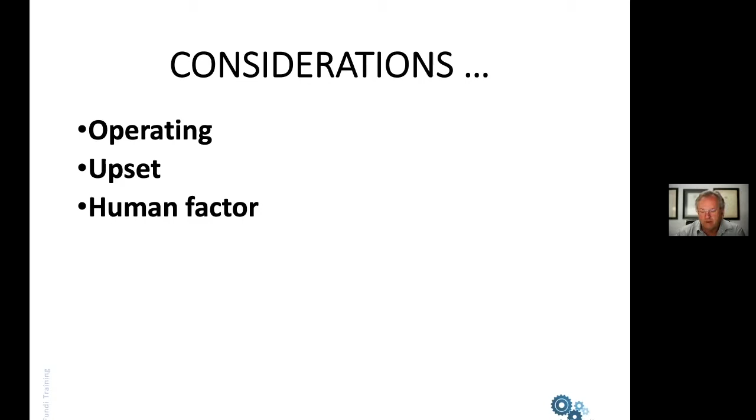We need to think about what can go wrong in the process that we're involved in that can change the conditions that we are in fact subjecting our structure or our plant or whatever it is. What are those conditions that we're subjecting it to? How can they change? And what effect is that change going to have? And then, of course, we're all human and people can make mistakes. We can overlook things. We can make choices based on previous experiences, and perhaps those may not be the best. So let's have a look at some of these aspects.

In operating conditions, perhaps the most important thing is how long do you want this thing to last? You know, you can make something out of 12 millimeter thick plate and it'll last for 200 years. If you only need it to last for 5 years, why make it out of 12 millimeter plate if that plate is going to corrode away? You may have other aspects such as strength and so on, which may determine that 12 millimeter plate is necessary. But then you need to know that that 12 millimeter plate is going to last for the entire life. If it corrodes away at 1 millimeter per year, in a couple of years' time, it's going to be unserviceable.

Temperature is a huge aspect to consider. Things that work well at ambient temperatures do not necessarily work well at high temperatures. Those high temperatures can be temperatures that we just experience out in the environment. Leave something out in the sun in the Northwest Transvaal, and you find that the temperature will go up to 60 or 70 degrees. And not all the materials perform well at those sort of temperatures. You may well design something for flow conditions, but what if that flow condition includes abrasive materials that wear away the coating that we are looking at, for example?

Sometimes just velocity can cause a problem. How fast is the liquid moving in a pipeline, for example? So many water pipelines are designed with a flow rate of something like 2 meters per second. What happens if you suddenly put in a constrictor, or if you have an elbow and the velocity increases significantly? Is it going to change the expected life of that material? And perhaps one needs to then put a different material of construction in place to handle those conditions.

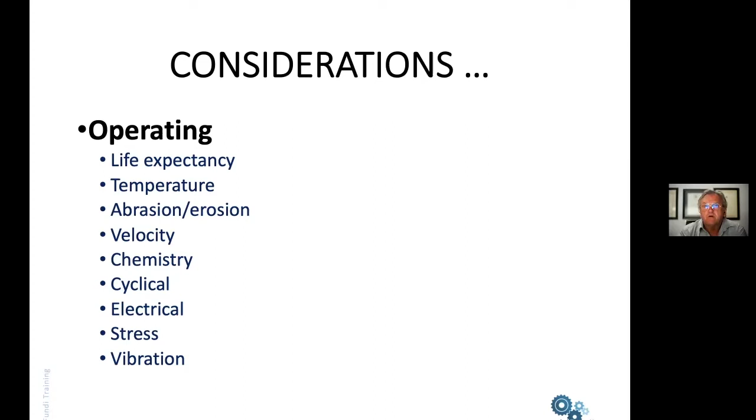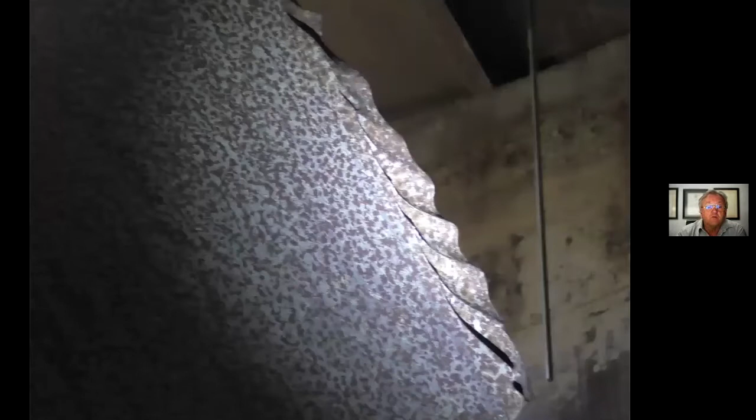Here's a photograph of a material that was selected based on chemistry and temperature. And as you can see, although there's some slight discoloration of the weld compared to the rest of the material, it has performed pretty well. But what wasn't taken into consideration in this particular case was erosion. And the net result was significant erosion corrosion on the tips of the impeller due to the abrasive nature of the slurry that was being agitated.

What about upset conditions? Perhaps one of the most common upset conditions is temperature. I remember a situation where we were called on to design a protection system for a bottle washer, and we had a very short period of time in which to do this work during a shutdown. And so the material that was selected was one that could take the temperature that we were given as a design factor and could be applied quickly and would cure. A few weeks after the bottle washer had been put back into operation, we got a panic phone call from the operator that the coating was coming out in sheets and contaminating the bottles.

So we went and had a look at this, and the coating had all the appearance of having been cooked. So we said, well, what is the temperature? No, here's the temperature. It was 55 degrees C or thereabouts, if I remember correctly. And we said, well, this coating has been subjected to much more than 55 degrees C. He said, no, that's impossible. If we exceed 55 degrees C, we're going to ruin the product. So we put some temperature recorders in this bottle washer, and guess what? During the night shift, the environment went up to 80 degrees C, not exactly what had been designed for. So we need to be very, very aware of upset conditions.

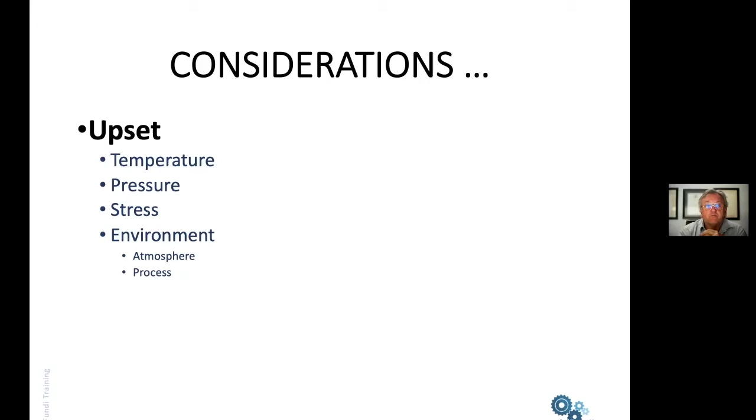So they were packed in straw and sent in a nice strong wooden box. The only problem was that whoever was handling this didn't realize that the contents were actually relatively fragile. And silicon iron anodes, if you drop them, they break. So our wonderful anodes were perfectly suited to the environment in which they were intended to be used, but totally unsuited to being transported in a wooden box.

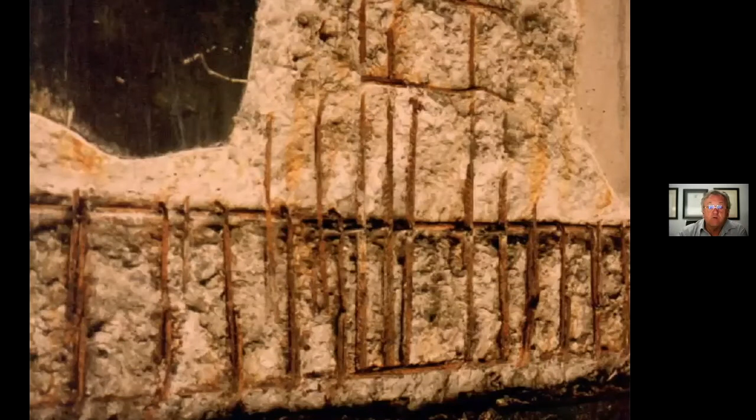Here's an example of a situation where a structure was designed for a particular environment, and due to fallout from an adjacent process, the structure was contaminated with highly aggressive salts, and the net result was serious corrosion of the reinforcing.

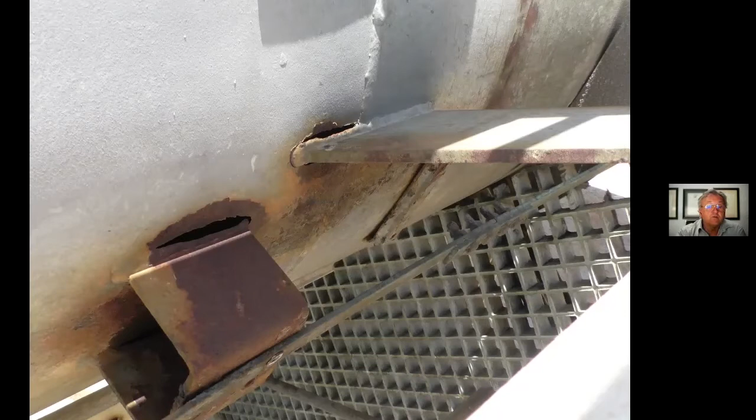Here's an interesting example of a chimney on a boiler. The material was selected for its strength. It was considered to be non-corrosive inside the chimney because the design of the chimney was such that the temperature would be above the dew point. And in spite of the fact that the boiler was using a fairly high sulfur content fuel oil, the situation was considered acceptable because the gases, in theory, were not going to condense.

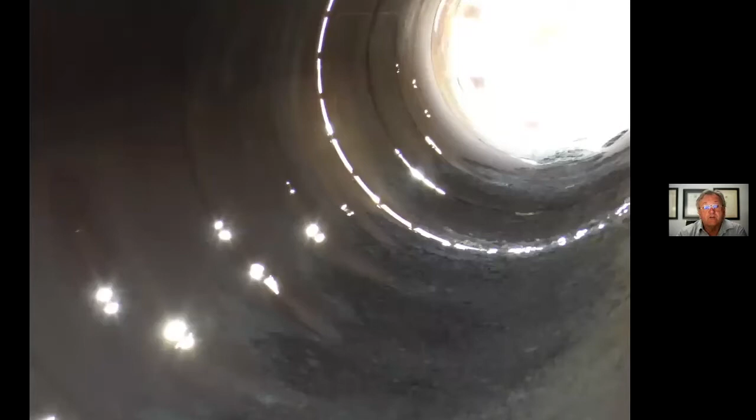However, what happened here is that the cooling effect of these sections that were welded onto the shell of this chimney caused those areas to be cooler than the rest of the structure, and therefore you got dew point conditions on the inside of the stack at these points. And when you look at the stack from the inside, you wonder that it actually was still standing at the time that they took it down.

We are human, as I've said, and there are a lot of things that can go wrong. Ignorance: if you never got told about something, how can you design for it? One of the most important aspects of professionals is that they undertake a code of ethics that says that they will not do something that they are not qualified to actually design. Unfortunately, many engineers step outside of those parameters.

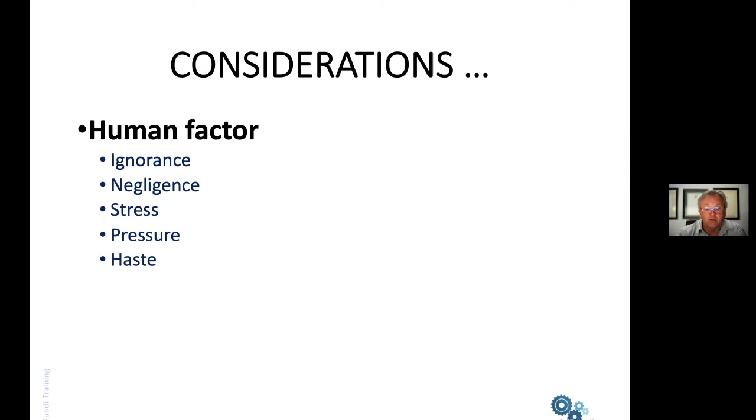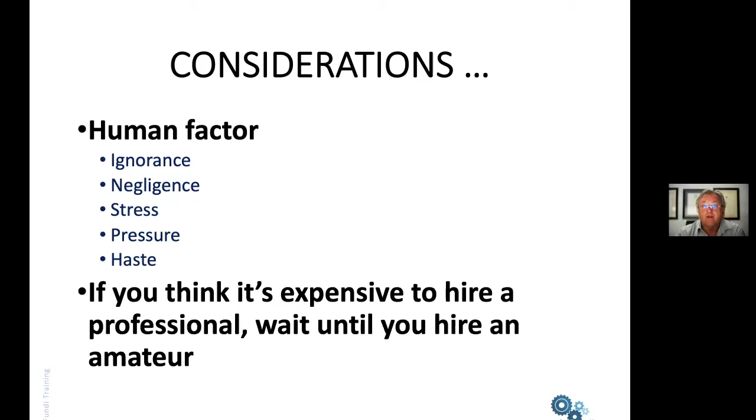It could be negligence, not thinking about something. The people involved could be under stress or pressure. It could be personal stress. It could be pressure of a deadline. You can be doing it in a hurry. Oh, I'll just quickly use that specification. And there's a very well-known saying: if you think it's expensive to hire a professional, wait until you hire an amateur. And that is not an immediate expense. It's something that comes later.

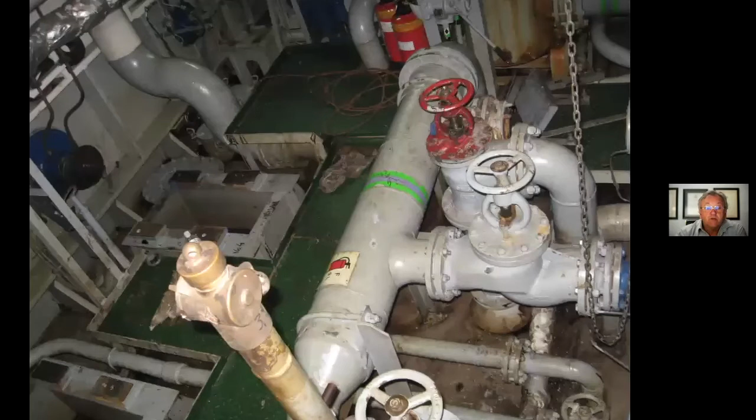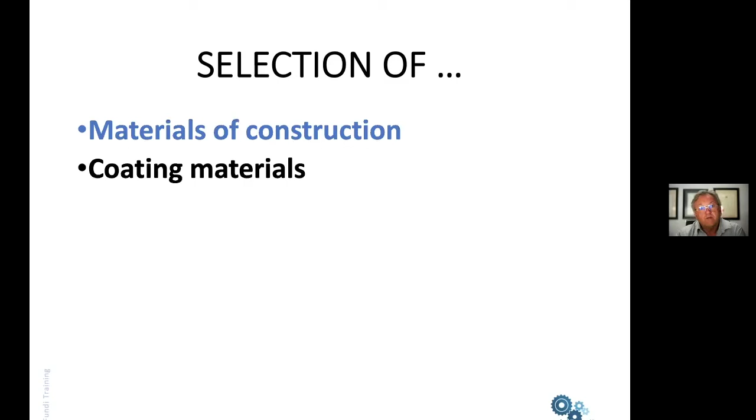So in terms of our corrosion situation, we can select materials of construction, such as in a seawater cooling system. What are you going to make those pipes and valves out of? Carbon steel, stainless steel, non-ferrous metals. We can select coating materials. What am I going to coat my structure with in order to stand up to the environment for the length of time? There is a bewildering array of coating materials that is available.

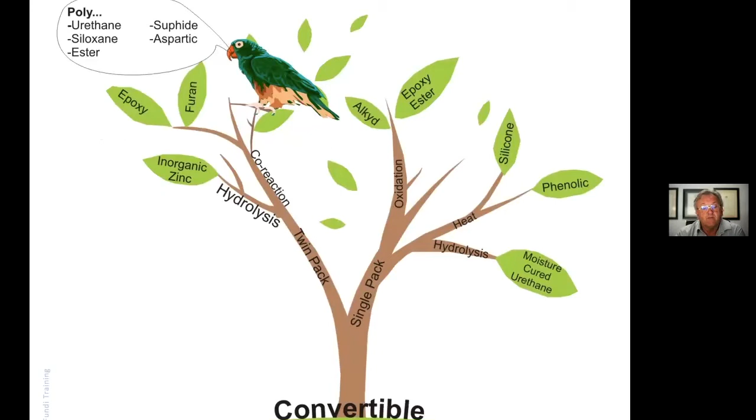There are two-pack materials, there are single-pack materials, there are special materials that are kind of a combination of the single-pack and twin-pack materials. How on earth do you choose which one to use? Well, we're going to be giving a series on coating selection in the near future.

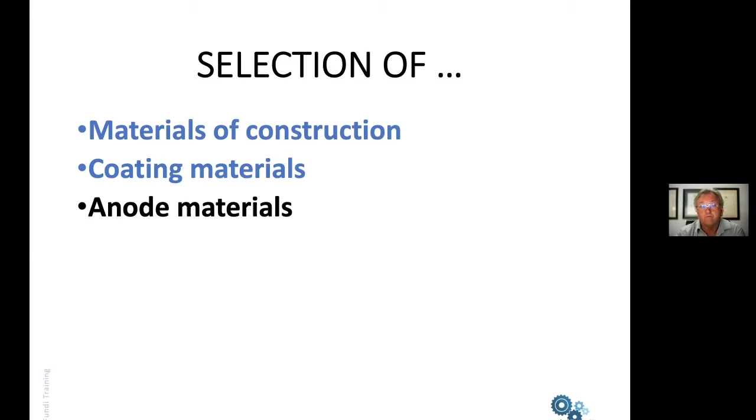In the cathodic protection industry, we can select different anode materials. Are they going to be made of zinc or magnesium or aluminium? Or if we're using impressed current, do I use lead silver anodes or activated titanium anodes or platinum anodes or silicon iron anodes?

So let's quickly just run through some consequences of choice. I think that is the best way to describe it. In terms of our materials of construction, our choices will affect wall thickness and corrosion allowance. If you were, for example, selecting a material for a sheet pile for a harbor, you cannot use a corrosion allowance on the wall thickness if it is being subjected to what's known as accelerated low water corrosion, because that's a pitting corrosion phenomenon, and wall thickness has virtually nothing to do with it.

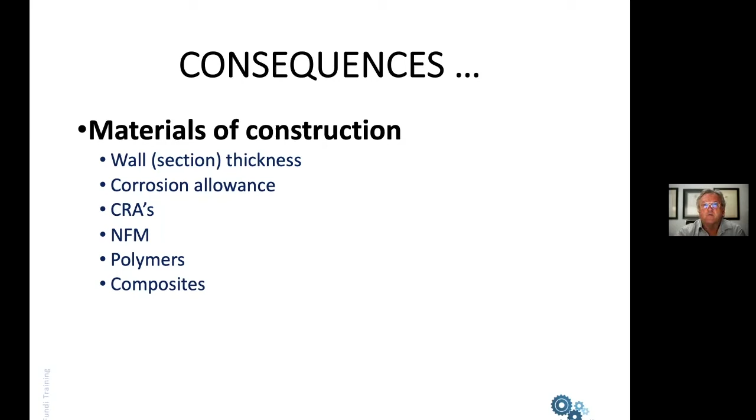We might decide to use corrosion-resistant alloys, CRAs as they are known, or non-ferrous materials, for example, in that seawater cooling system. And there's a whole host of polymers and composites that are now becoming available, which give us good corrosion resistance. But then what about the mechanical properties? We mustn't forget those.

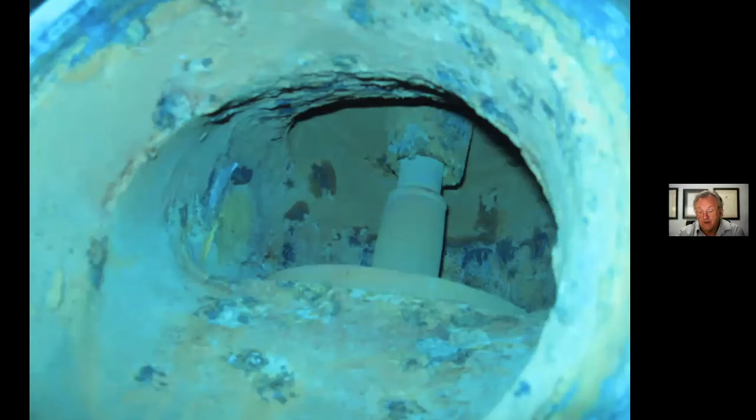This valve was made out of cast iron and had been put inside a cooling system that was made out of copper nickel. And the copper nickel that plated out on the inside of that valve set up a bimetallic corrosion reaction, and the net result was a failed valve. Here's an example of internal corrosion where the wall thickness only just held. You can see the effect of the internal pressure where this particular pipe was on the point of rupture.

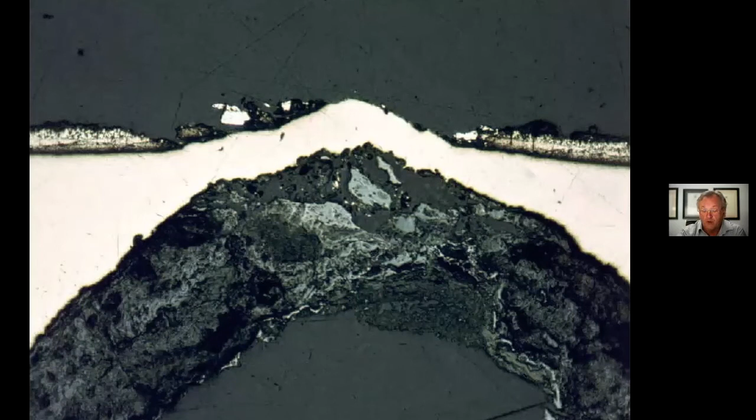Consequences of choice in coating materials. The cost of the coating material. Often people balk at the cost of the actual material, not realizing the material itself is a very small part of the overall cost of the system. You need to relate the cost to its service life, to its application. In other words, do a complete life cycle costing analysis in order to make the correct choice of material.

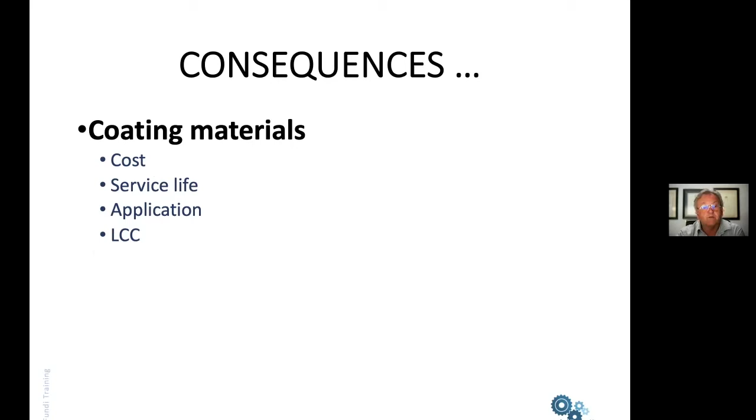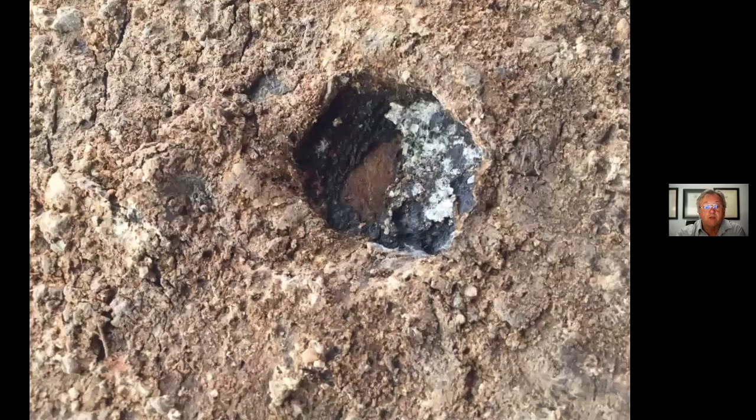Here's an example of a correct choice of material, say coating on a pipeline. And as you can see over here, the pipeline has been bedded in fine sand. Well, this worked extremely well. And after construction of this some 70-odd kilometer pipeline, there were only a handful of mechanical defects on the entire pipeline.

So the next project that came along, they used the same material, but they didn't use the same sand padding. Due to the higher temperatures and the non-sifted backfill, this coating actually then was subject to penetration, and there you can see the hole left by a stone that had become embedded in the coating, setting up a coating defect. And this pipeline had literally hundreds of defects.

Consequences of choice in anode materials. If you use the wrong anode material, perhaps the anode will corrode away by itself without doing any work. Perhaps it'll go to sleep, like that picture of the zinc anode that I showed you earlier. Maybe it will get consumed too quickly. Or if you use the anode in a saline environment, you may well land up with cable failure if you haven't used the correct anode cable insulation.

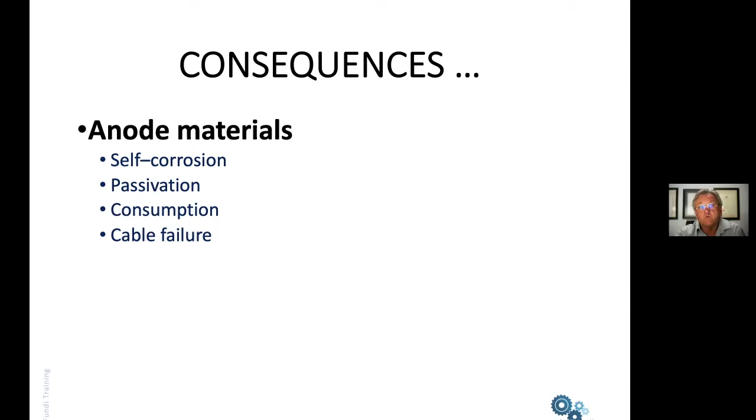You cannot use conventional cables in chloride environments like seawater or brackish water or brack soil even, because of the generation of chlorine gas. So here's an anode that corroded away by itself, never mind providing any protection.

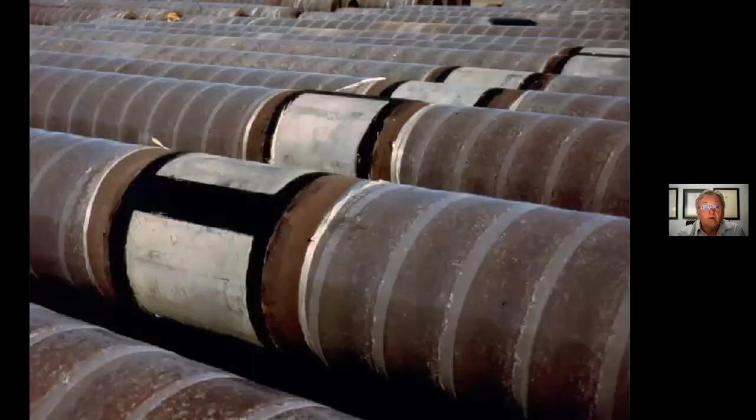These anodes were used on an offshore structure, and there was a hasty decision made to merely continue the same principle of corrosion protection for the 2 kilometers of onshore pipe. Problem is, when you put an aluminium anode onshore without chlorides around, it goes to sleep. And that became, again, a very expensive, incorrect material selection.

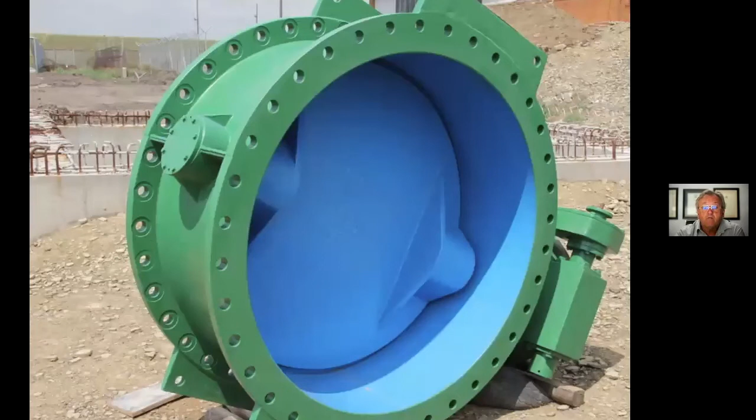Vanessa showed us this wonderful valve. And a valve is a very, very good example of materials selection philosophy. Let's have a look at what a valve comprises: usually a cast iron body. The blade may be cast iron, which is coated, as was that photograph we've just seen. It could be a high chromium iron, it could be a stainless steel.

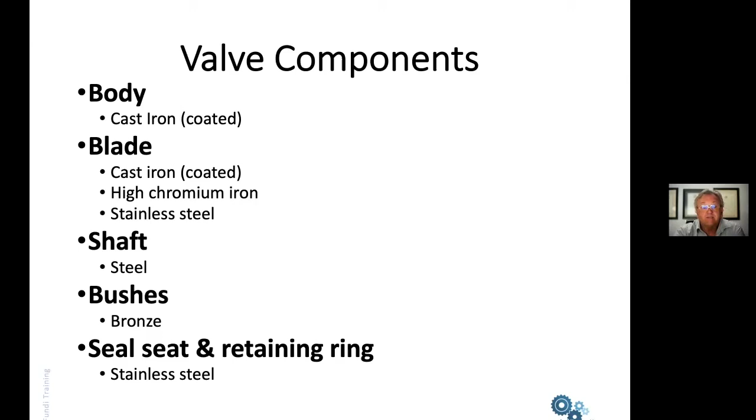The shaft generally is steel for strength. The bushes may be bronze, they may be Vesconite, they may be something else. The seal seat and the retaining ring are generally stainless steels. When you put all these together, you need to remember that there's this thing called the galvanic series. And anything that is at the bottom of the series will corrode when it is coupled to something higher up.

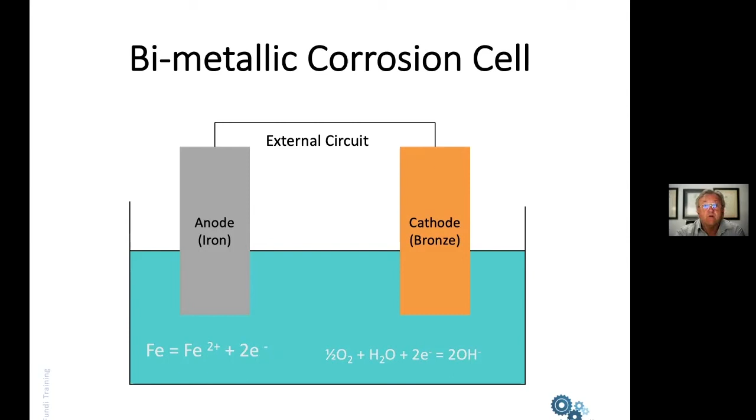In that valve situation, if we had a steel shaft and a bronze bush, if those are exposed to the water, in other words, if the seals fail or if there are no seals, your steel shaft is then going to corrode inside or adjacent to the bronze bush. Here's a good example of a valve construction that was exposed for something like 20-odd years.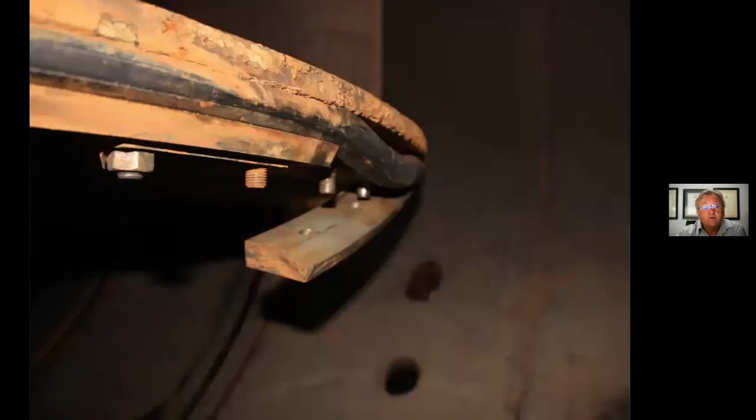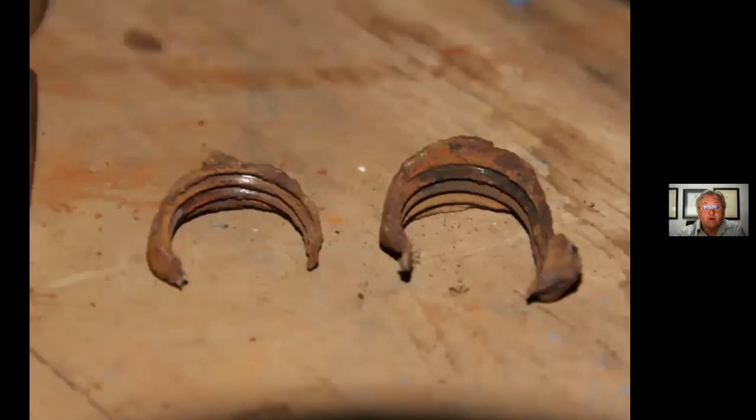Here's a similar situation. In this case, it led to an expensive failure of a valve, a $50,000 valve, because one of the main contributors was the incorrect nuts. There's the remains of the nuts that we picked up on the bottom of the pipe that used mixed up stainless steel and carbon steel nuts. Carbon steel nuts corroded away, and the net result was that failed seal retaining ring.

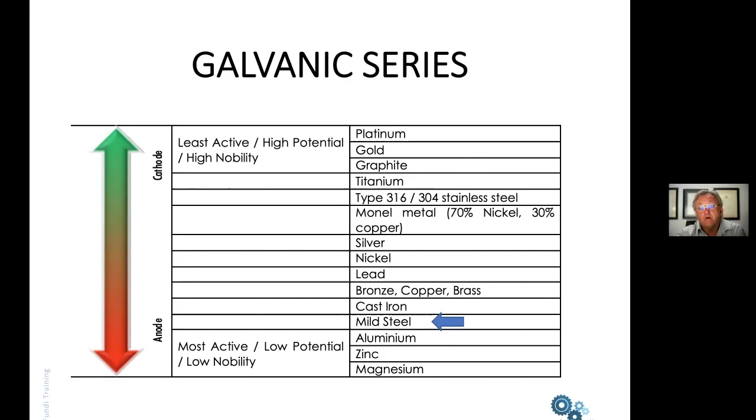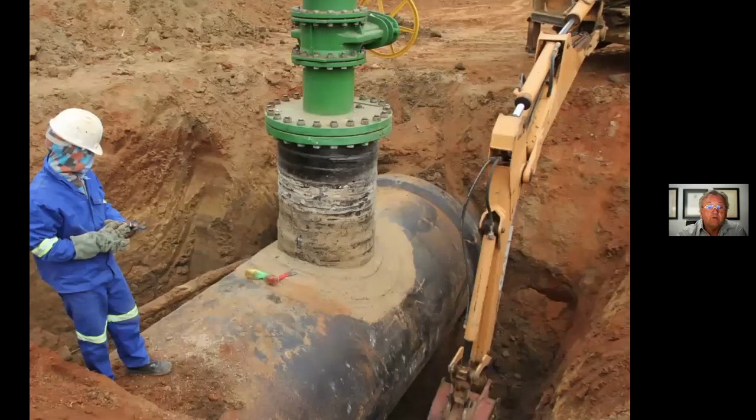So remember, guys, Goedkoop is Duurkoop. If you save a few rands at the outset due to choice of the wrong materials, it's going to cost you in the future. This is a fairly dramatic example of that. This air valve stub on a pipeline was wrapped with a bituminous felt used for waterproofing instead of the coating system that was specified for the pipe. The net result was a 100,000 Rand excavation in order to repair it. I think that says it all.

Thank you. Thanks, Neil. That's fairly eye-opening as to the impact of our material selection. As a first question, there's such a bewildering choice of materials, both for construction, for anodes, for coatings. How on earth do I choose?

You could go back to that comment I made during the presentation on hiring a professional versus hiring an amateur. There are many people around who have got experience in corrosion and metallurgy, in coatings, in stainless steels, in copper. They've got experience in the operation of plant because they've been operating, for example, in the Department of Water Affairs; their engineers have been operating plants for decades. They know what works and they know what doesn't work. There's no one person that knows everything. I might have experience in metallurgy and corrosion protection, but don't give me the water treatment problem to solve. I will phone up a friend.

Don't be scared to ask questions. Go to people that know, and perhaps go to many people that know, rather than relying on the input from one particular person who may have their own solution. And that may not be the best solution, not because they are deliberately trying to mislead you, but because they perhaps are not aware of what all is available.